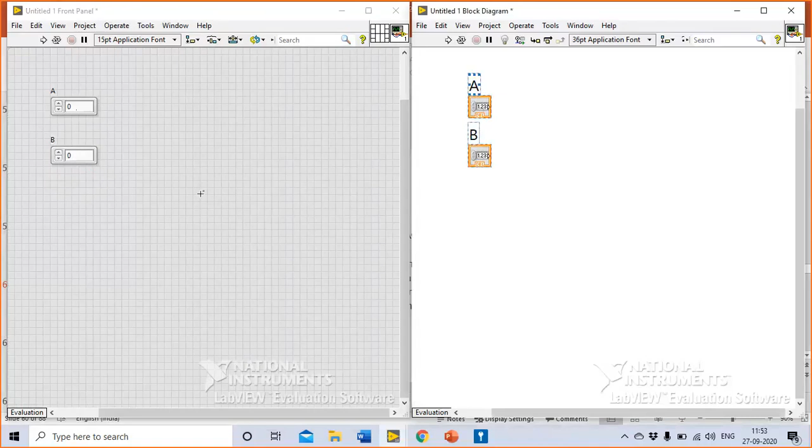I again go to numeric, create another number, call it B. Now what representation are both of them in right now? Floating point - they are both floating point double precision numbers. So I can enter decimal values here as well, because it's a floating point number. Now I will add one indicator to indicate the result.

And we need to add a control to provide the operation, like what operation the user wants to perform on these 2 numbers. Now, how many of you understand the term called enumerations? Parikshit sir had covered this on the first day. How many of you understand enum? Okay.

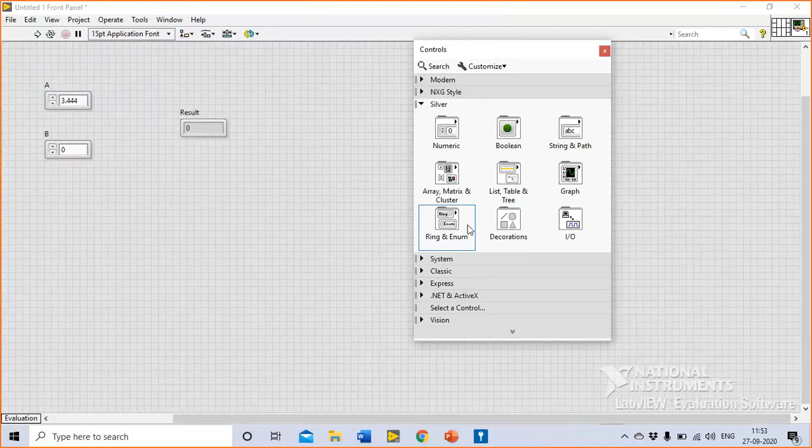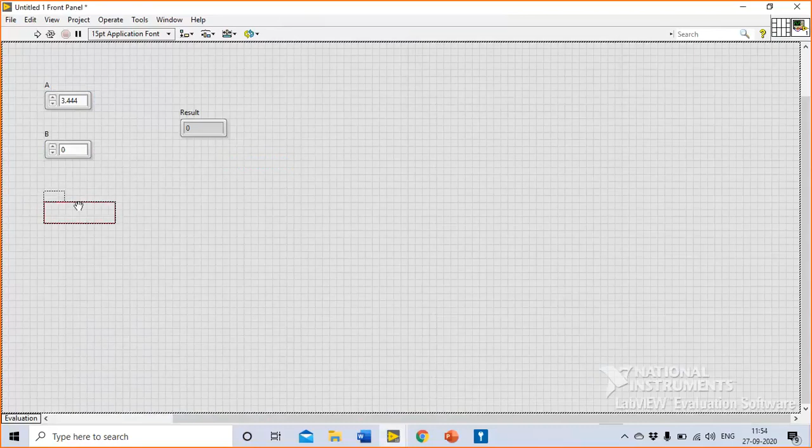Basically, what enumeration does is, so where to find enumeration, first of all, I'll do that again for you. Right click on the front panel, you go to controls palette. Under controls palette, go to silver. Under silver, go to ring and enum and choose enumeration. Okay. Now, what enumeration does is basically it links various strings to a particular decimal number.

So let's say it will map add to 0, subtract to 1, multiplication to 2, division to, let's say, 3. That means if I add a string here, add, and a user chooses that, it will go as 0 to my block diagram. I can handle it as a number instead of a string, right?

So let's try that. I go here and click on edit items. Okay. And I insert my first value, which is, let's say, add. I insert the second value, which is subtract. I insert another value, which is multiplication. And I insert another value, which is division. Is everyone with me till this point?

Sure, I'll do that. So let me do that again for you. I'll remove this. We will go to silver, and we'll go to ring and enum, and place an enum. Vinit: Yes, sir, we have to enter in the reverse manner, na? Because it goes one down. Yeah, I will do that, sir. I'll help them change that. But first of all, let's enter the values. Okay, everyone done till this point where you have been able to place an enumeration on the front panel? Okay, I assume that as yes.

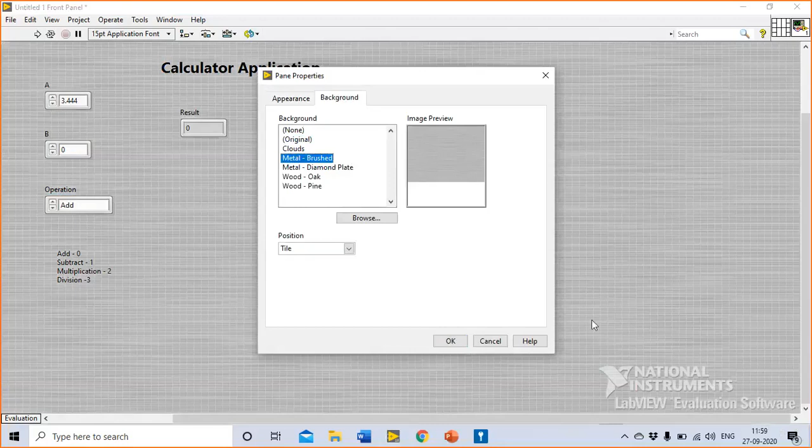I can add certain text here. How do I add a text here? I can simply double click on my screen and start typing here. I can of course change the size and text of this, and I can make it bold by pressing Ctrl+B. I can also change the background of the screen. Go to the bottom corner where two scroll bars meet. At this point, right click and say properties, go to background and make it metal brushed. Okay, my front panel is done now.

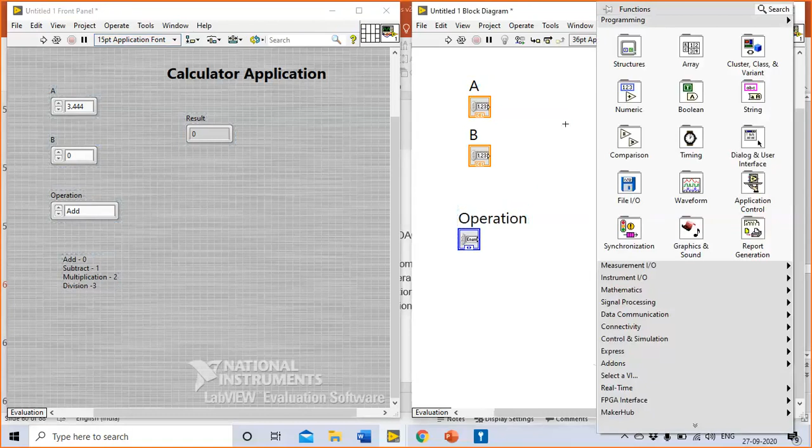I will move back to my block diagram. As you can see, while I placed certain controls on the front panel, I have their terminals on the block diagram. Now I will place a case structure to handle the various cases of add, subtract, multiply, divide. So I go to the block diagram, right click and go to functions palette. Under functions palette, go to programming. Under programming, go to structures. Under structures, go to case structure. Okay, my case selector terminal would be this enum.

As soon as I connect it, though it is an integer, blue numbers are represented by integers. Though it is an integer, on the case structure you can see them as strings. Why? Because the enumeration has already mapped these strings to decimal numbers, right?

Now I only have two cases here, add and subtract. I want to add two more cases. So I can right click the case structure and say add case for every value. As soon as I do that, I will have 4 cases, one each for add, subtract, multiply, divide.

I will wire my A terminal, or the terminal of my A control, to the boundary of the case structure to create an input tunnel. In a similar way, I will wire the terminal of B to the boundary of my case structure to make an input terminal B, right?

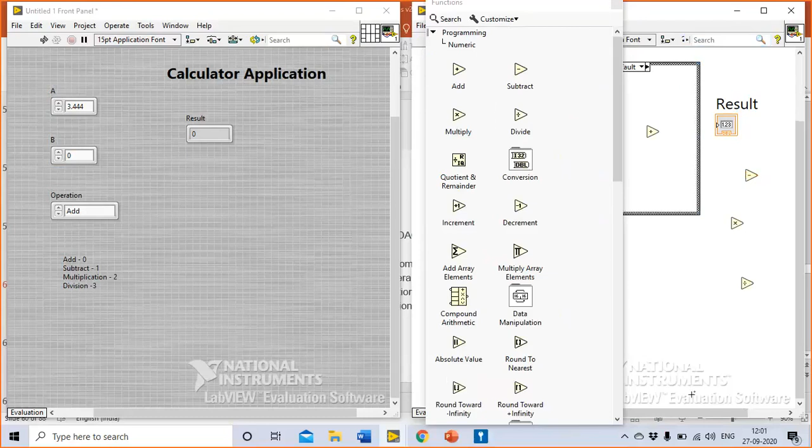I'll go to the add case. I will simply right click, go to the functions palette. In the functions palette, under the programming tab, I'll go to numeric. Under numeric, I have add operation, subtract operation, multiply operation, and divide operation. I will close this here.

I've placed the add operation inside the add case, and I am just wiring the numbers. The output has been wired from the add operator to the result. While I was wiring, it automatically created an output tunnel. Right now it is blank, there's a small white patch inside this tunnel. Can anybody answer as to why?

Because all cases are not defined right now. Yes, all cases are not yet defined. That's a very right answer. So let's define it for the other cases. I'll go to subtract, and you can see nothing is going here. So if this program runs, LabVIEW would not know what to show in the result, and hence it gives us an error that you have not wired the tunnel.

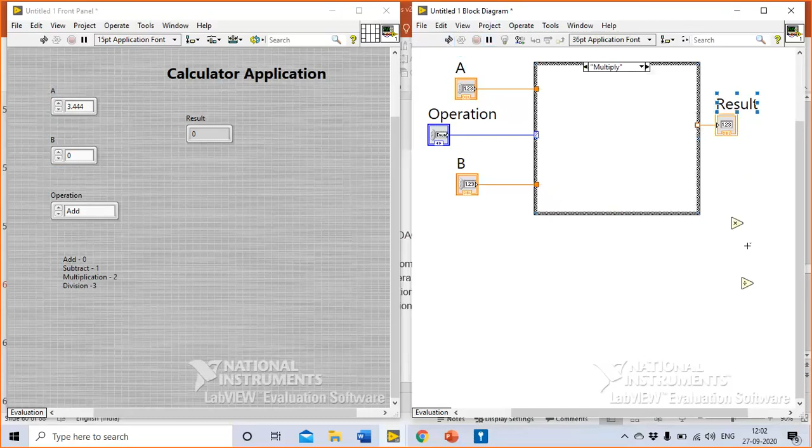So I will place subtract inside the subtract case, connect it, and connect the result. I will again go to multiply. In multiply, again I will move my multiply operator inside, wire these, and connect it to result.

In the divide operation, this is the critical piece. If I simply wire this, and if this is 0, it will pass on a NaN result, not a number. So what we can do is create another case structure inside this, around this portion of my code. The selector terminal of this case would be connected to a logic.

I want to create some space here because I'm left with little space. So I press Control on my keyboard, left click here, and drag my mouse. So I'm able to create some space to add some logic here.

Now the logic I want to add is whether it is equal to 0. If B is equal to 0, then the division should not happen, right? So rather I should say B is not equal to 0. If B is not equal to 0 and that statement is true, then division will happen. If B is equal to 0, then this will go to the false case, and we can add our logic here.

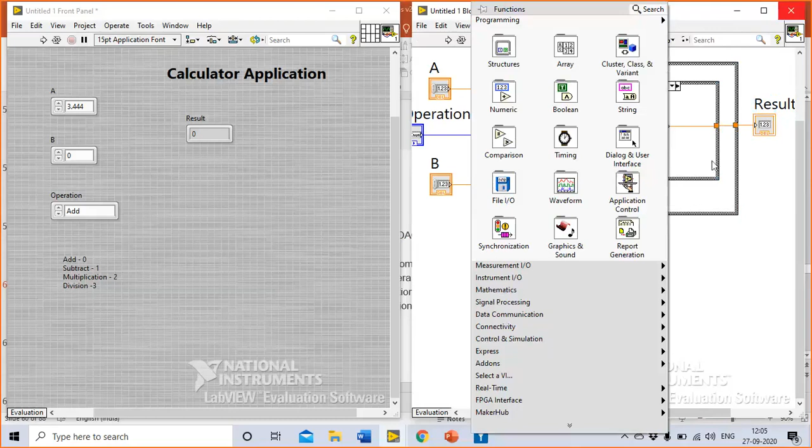So we can simply let it divide and show infinity in the results, but we will pass on a message to the user here, right? How do we pass a message to the user? We can create a string indicator. How do we do that? We come to the front panel, right click, go to silver, string, and create a string indicator. Okay, now we have an error here.

Okay, we have an error. Hello, sir. Yes, ma'am. Can you repeat the division section again? Sure, absolutely, ma'am. Do you want me to repeat the inside case structure as well, ma'am? Yes, sir. Okay, no problem.

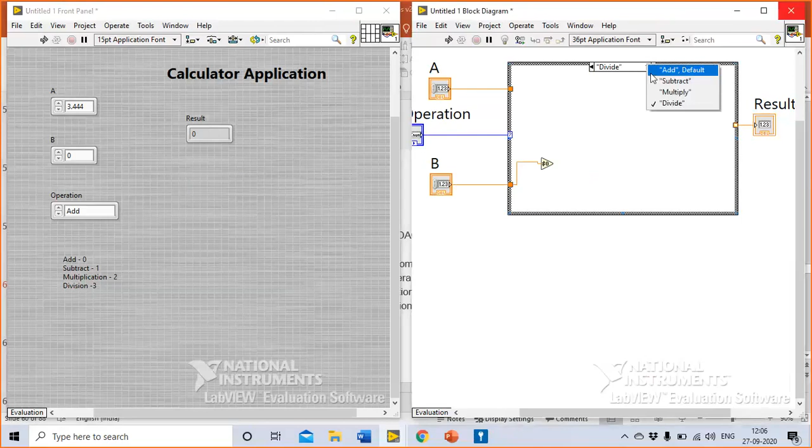I will delete this. We've just finished add, subtract, multiply, and we are doing the programming again for the divide portion. First of all, we need to check whether this number is equal to 0 or not. To find that, I can simply use a comparison operator. How do I find it? I right click on the block diagram, go under the programming tab, go to comparison, and say not equal to 0.

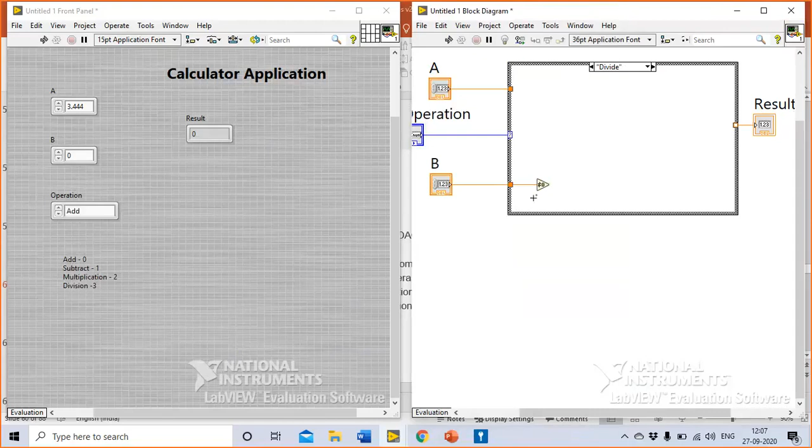Okay. Now, if I'm using a not equal to 0 operator, that means if a number is equal to 0, it will give me false. If a number is not equal to 0, it will give me true. So if it is not equal to 0, then I will get true. If it is equal to 0, then I get false. I've just added this as a comment for you to remember this.

How to add a comment? You can simply double click and start writing. Is this clear till this point? Should we move ahead?

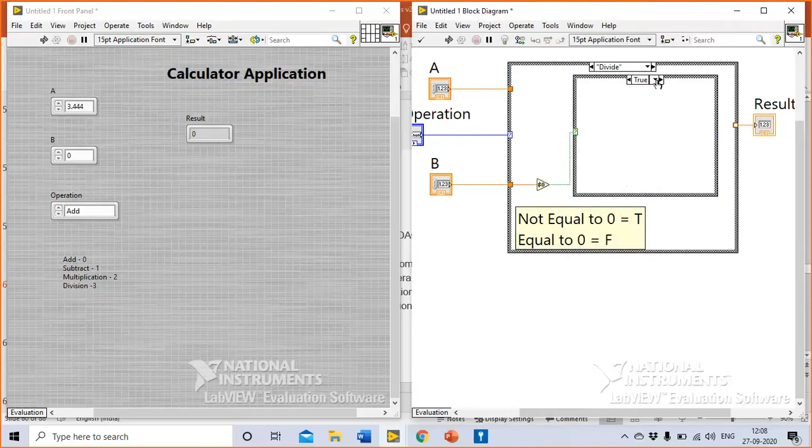I cannot hear anyone. I'll place another case structure inside this case where I will wire this comparison terminal to the case structure. So if it is not equal to 0, I will get true. That means it will get into the true case. So what should I do if the number is not equal to 0?

I can simply divide, because if the denominator is not equal to 0, I can go ahead and divide. Now, how do I place a divide operator? Simply right click, go to numeric, and place a divide operator.

Okay. While we did this, we saw that there is a tunnel which has not got all its values. Why? Because there is nothing in the false case. So we should give something in the false case. There are a couple of approaches which we will discuss. The first thing we can try is simply let it divide, but notify the user that there seems to be some problem with your denominator. So I will simply let it wire.

Is it done till this point, ma'am? Yes, sir. Okay, great. Now we have to indicate to the user that there is something wrong with the operator. So how do we do that? We come to the front panel, right click, go to silver, string, and string indicator. I place this on the screen, name it error.

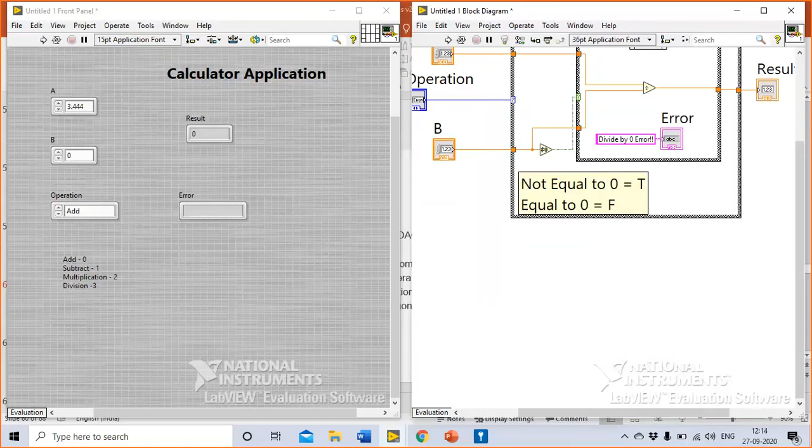Did anybody unmute? Anybody has a question? Okay. Shweta ma'am, is it this portion of the code or the complete internal case again? Okay, only this portion of the code. Yeah, I can do that again for you.

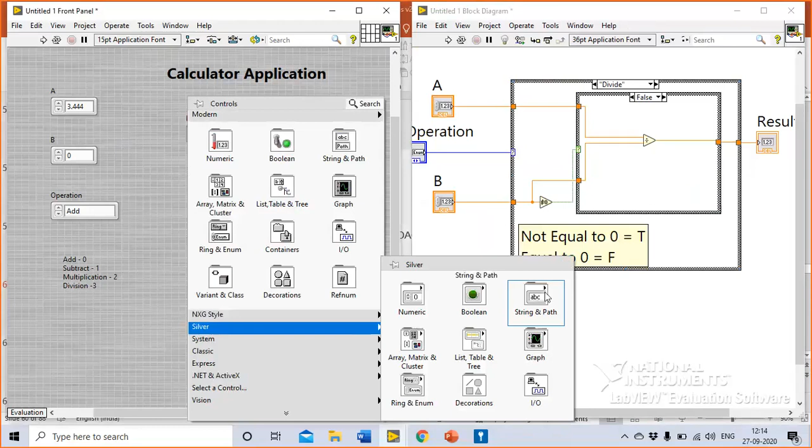I'm deleting it. Okay. Now I want to indicate the error to the user. I go to the front panel, right click on the front panel, go to Silver, go to String and choose String Indicator. Please remember to do this on the front panel. All controls and indicators are created on the front panel. So I will name it as error.

Now bring this error inside this internal false case. Once it is done, you can simply right click this terminal and create a constant. In the constant, you can mention divide by 0 or divide by 0 error. Simply just write that. So this indicator will display whatever you mention in this constant. Great. Any questions, anyone? Please ask now. Otherwise, I'll move to the next step.

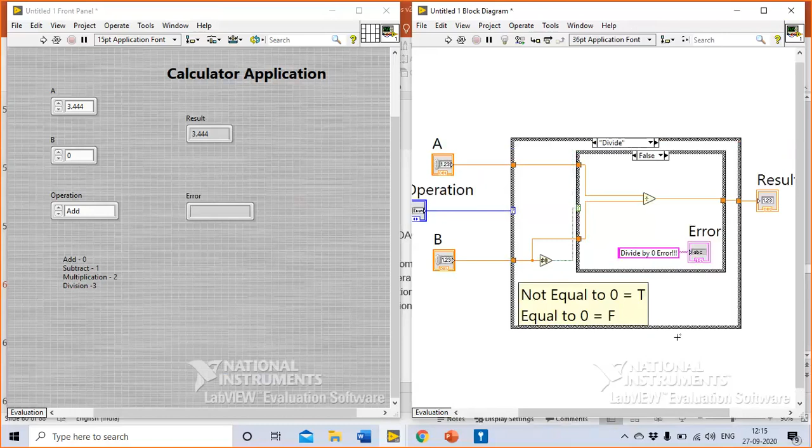Okay, we need to do one more thing here. If I run this, it will run only once. I want to make it run continuously, so I have to put this inside a loop. So I will go to Programming, Structures, While Loop, and place a large while loop around this. And in the stop terminal, I will create a control for the user to stop the program. And I will bring this stop to the bottom for the user to stop this. Is that okay, everyone?

I will run this program. We can see it is running. Let's change the operator. Let's say I do subtraction. It gives me -2.556. And let's say I multiply, it gives me 20.664. If I divide, I get 0.574. Let's test out our divide by 0 condition. Let me take it down till 0. Okay, so it shows infinity at the result and shows that there's an error of divide by 0. If everyone is done till this point, then I'm going to add a few more things here.

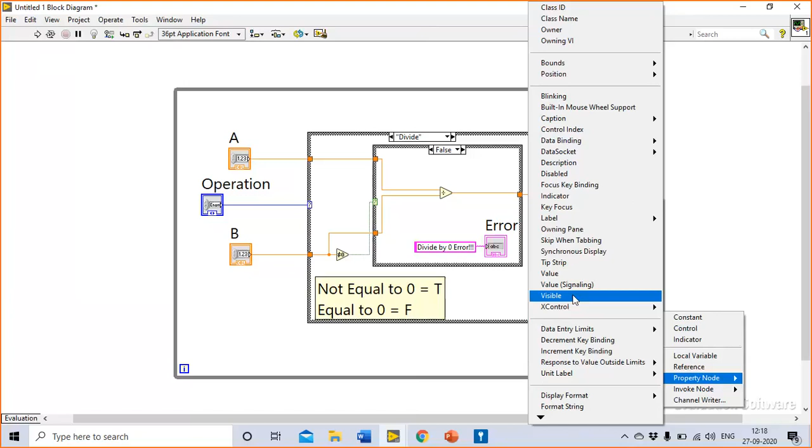Can we make the program in a way that if we find this divide by 0 error, this result is not shown to the users? We can just hide this indicator itself. Now, the way we hide indicators in LabVIEW is through the properties of these indicators. So I have this result indicator on the block diagram. I will right click this and create a property node. Right click, create property, and there is a Visible property for this indicator. I will place the Visible property.

Before that, there is another issue with the program right now. The issue is I have placed divide by 0 error in this error terminal. Even if I correct that error, it will continue to display this on the screen. So for a moment, I'm putting this visible part on hold because I uncovered another issue with the program. So let us see that. You can still see my value is 234, but it still shows divide by 0 here. Can anybody tell me why?

Actually, once the false case is run, it's not getting updated after that. Yes, the string indicator is not getting updated once it has entered the value, right? So how do we change that? We will bring the error indicator outside our loop, so that for every case, for every operator, there is some value going to this error. So when there is an actual error, which is this case, a divide by 0 error should go. In all other cases, an empty string should go to the error.

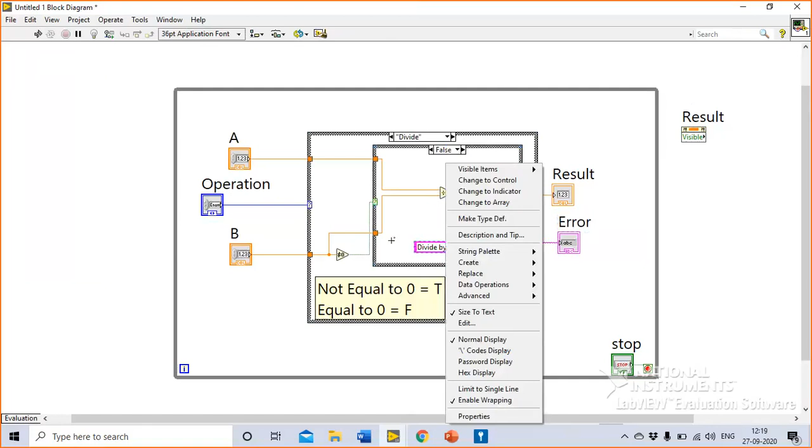How do we create an empty string? Just select this, press Ctrl C on your keyboard and press Ctrl V. You will get this string. Bring it outside the loop. Highlight the text and press backspace, so you get an empty string constant. Place it in all other cases. The string should be given to all other cases. I will again Ctrl C, Ctrl V, get another copy of it, and place it in all my cases. Everyone with me till this point?

Everyone with me, or is anyone facing trouble? Now if we test it out. Sir? Yes. Sir, if we do a use default if unwired, then won't it give a blank string or any other? It will. It will.

So let's say what Raghav is asking right now is, let's say I delete this statement here. Okay, I have deleted this. Now this tunnel says that nothing is wired to me in this case, so it is giving an error. So I can right click this and say use default if unwired. Yeah, what is the default for string? It should be an empty string. Let's try that out. Okay, so we'll remain in divide case, make it 0, and go back.

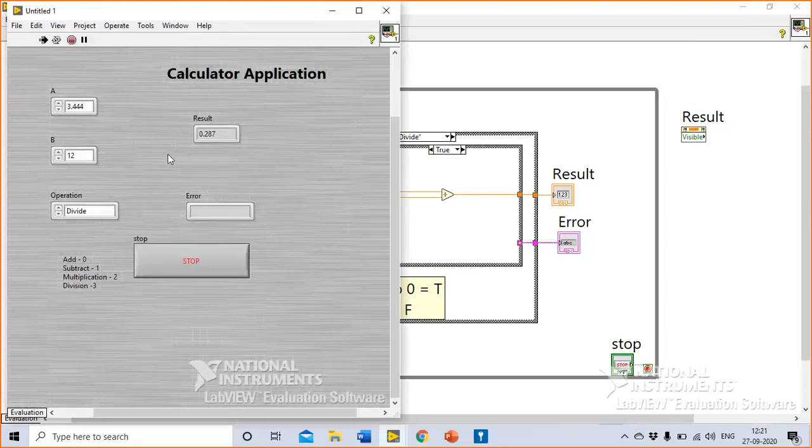Yeah, so a shortcut which Raghav just pointed out was, I don't want to place these strings in each of my cases. I simply want to let it use a default value. So I can right click this tunnel and say use default if unwired. Now, what is a default value for a numeric indicator or a control? It's 0. Yes, the default value is 0 for floating point, integers, unsigned numbers. For strings, the default value is empty string. Yeah, both the options are perfectly fine.

Okay, I hope all of you are with me till this point. Please confirm on the chat window. Then I'll move to the next step. We have to quickly get to a Talking Tom application also. So please confirm on the chat window whether you've reached till this point or not. Great. Couple of people responded, so I hope all of you are with us.

Now, the next step is, as soon as we find a divide by 0 error, we will hide this indicator. How do we do that? Come to this result on your block diagram, right click this and say create property node and visible. Now, what is a property node? A property node is a programmatic way of accessing properties of your front panel and block diagram items. Programmatically I can access their properties and change them, right?

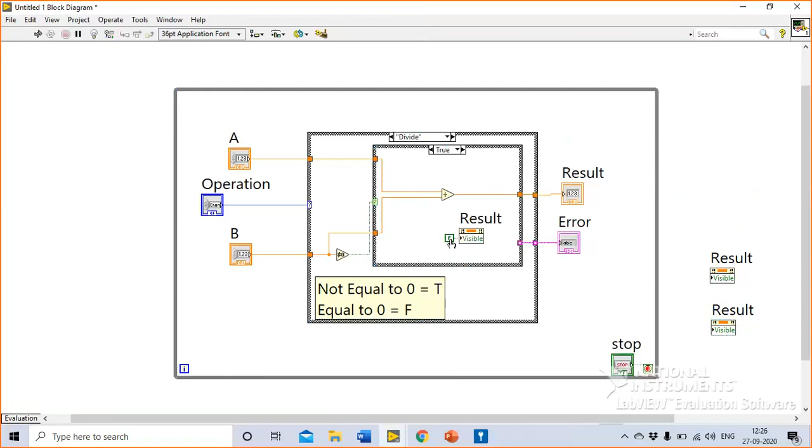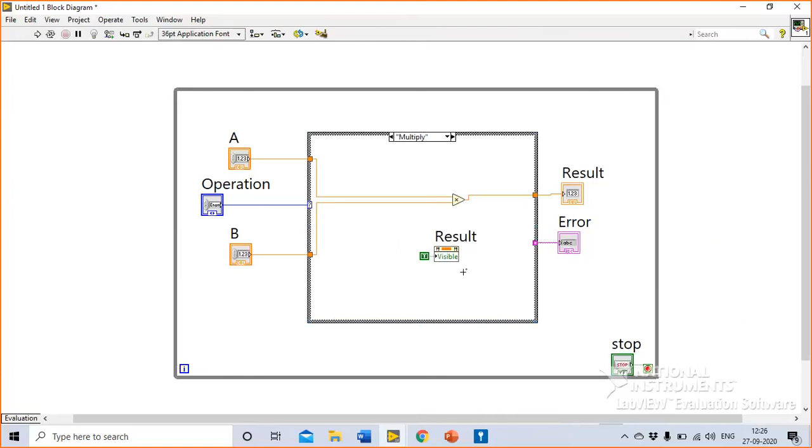I've pressed Control and dragged. True. Multiply. I'll place this and make it true. Let's test this out. Okay, I will run it. I will keep changing this number, bring it down.

Am I audible? Yes, sir. Okay, my electricity had just gone, so I was just checking if you can still hear me. Okay.

Okay, now I will bring it down to 0. You can see as soon as I make it 0, this result vanishes and gives me an error, divide by 0. I will increase this. I get back my result and the error also vanishes.

I'll just be back in 10 seconds. Just give me 10 seconds.

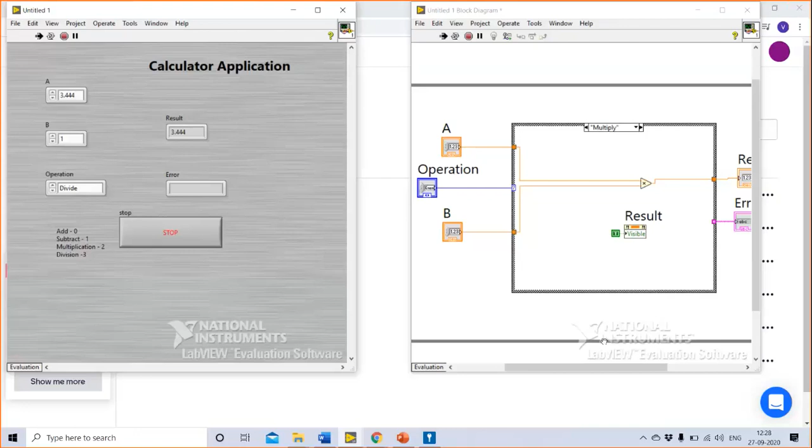I am back. So is everyone with me till this point? You've been able to make this? Sir, I'm not able to drag the property node. This one, the property node, right? Yes, sir. Okay, so do it with me. Let's say you have one property node. First of all select this. Okay, done. Then press Control on your keyboard. Click this and then drag your mouse while clicking.

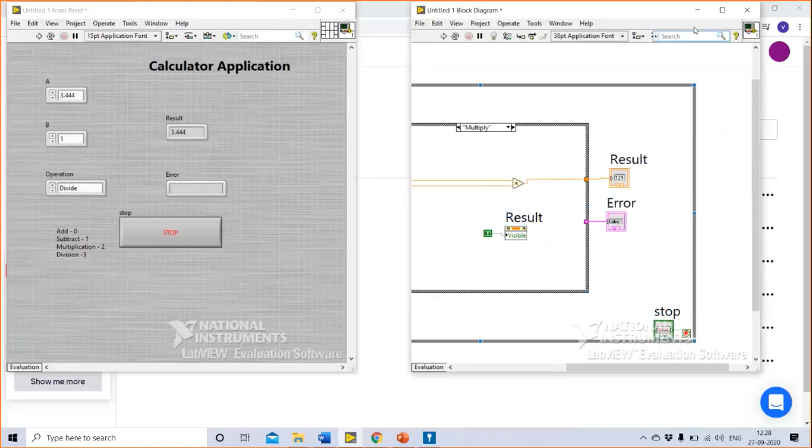Were you able to do it? Done, sir. Now in all other cases we have to make it true except for the divide by 0 case. Only in the divide by 0 error condition we have to make it false. In all other cases we will make it true.

Isn't it interesting? The way you can simply control the GUI of your software, you can add logic to your program. So please tell, how do we get that visibility node?

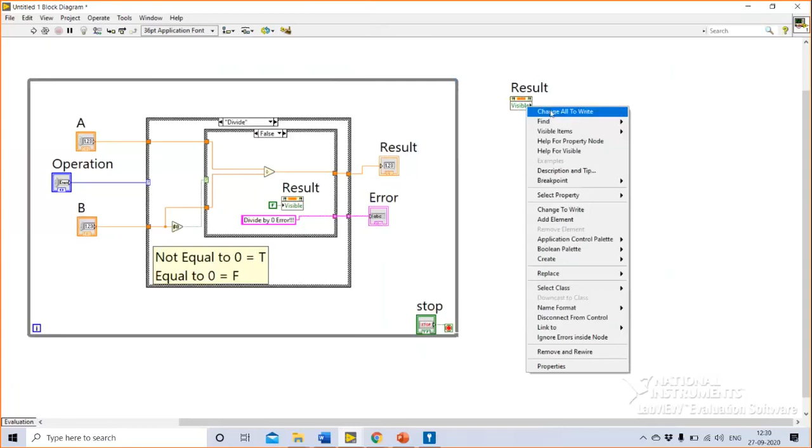Right click the result. This is my result, right? Right click this, create property node and go to visible. As soon as you do that you will be able to create a property. Now right now this property is in the form where I can read from it, but I want to write to it. I can right click this and say change all to write.

There was someone else who had a question. Sir, why is it that if we are giving a visible property, we have to define it for everyone? For the false case of divide, I defined a visible property, and in the other cases I didn't define it, so it's not getting updated there. I even tried to take it out of the case structure for the result and the error. But still the same thing was happening: once the result disappears, it's not reappearing unless I give it separately for each and every case. Why is that happening?

Okay, let's understand that, Raghav. Let's say what you're saying is I have made the visibility false here, and I don't define it anywhere else. Is that your question? Let's say I make this false and I remove the true in all other cases. Now, why do I not get it visible again? Is that the question?

So now, Raghav, once in the divide by zero case we have written false to this, that means I have changed the property of this indicator. I've changed the visible property of this indicator, made it invisible in one of the cases. Until I make it visible again, until I change the property of this indicator again to make it visible, I will not see it on the screen. Do you agree with that statement? Agree, sir.

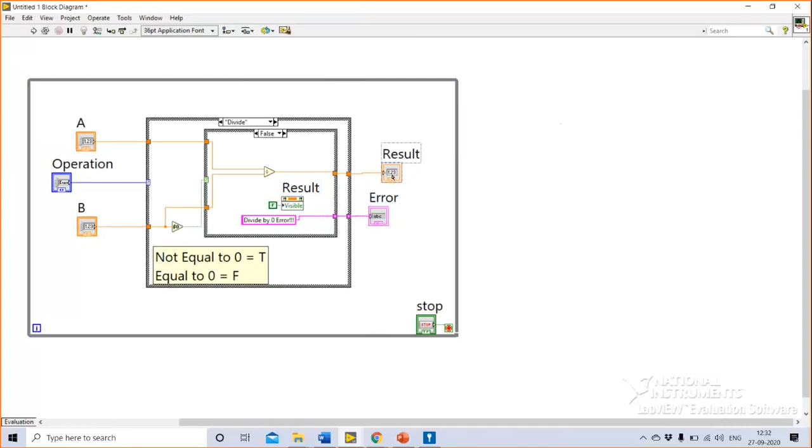Now, it's a property, a characteristic. Once it's changed, it has to be changed again, reverted back for you to bring it to the original condition. Once a property is written, it is written. So if I've written false to it, it will remain false until you make it true again. Agreed? Now there is another scenario.

Let's say I make a copy of this. Come into the true case and just make it visible here. So what I'm saying is, if I have a divide by zero error, I will make it false and it will disappear. And if I don't have a divide by zero case, it will make it visible again. So what will happen now? What can be a condition in which I will not see the result even if there is no error?

Multiply, subtract, add. So what can happen is, let's say I'm running the program. I don't have an error right now, then I have an error now. This has vanished. And if I move to a different case now, I will not see the result because the property has not been written again, the property to make it visible has not been written again. When will it be written? When I go to divide and make it non-zero, only then the property will be written, which is not the right way of programming.

What we wanted is, if there is any case where there is no error, then the result should appear. So the best way to do that is to add this property node to all the cases and make it true in all the cases. I think I've missed that, yeah, great.

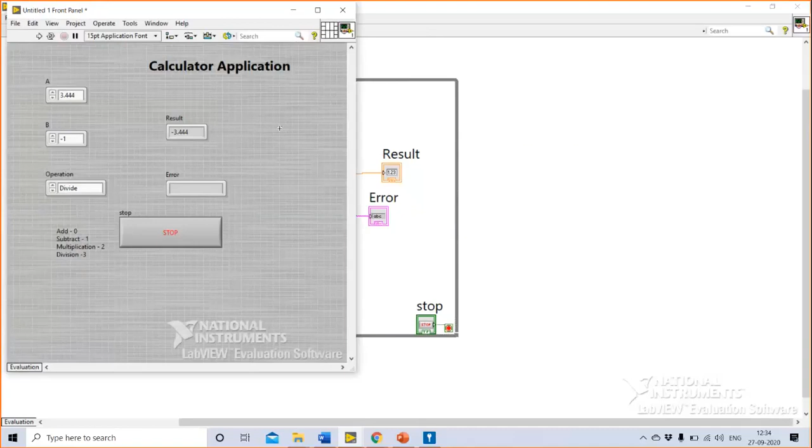So I hope everyone is with me. Can we move to the next section of DAQ and the audio analysis application which we have been talking about since yesterday? Yes, sir. Okay, great. Thank you for the confirmation. Let's move on.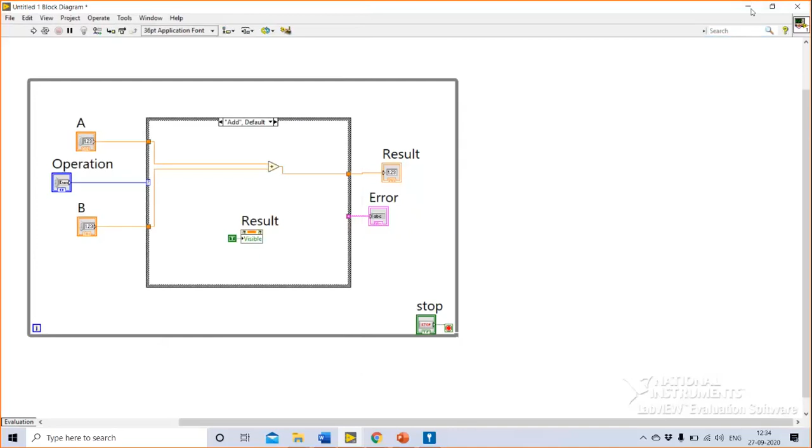Now what we will do is, we discussed about Arduino yesterday, right? We interfaced till this point. Now let's say, do you remember what was the ADC resolution of the Arduino? Does anybody remember?

Do you all remember there are 3 R's of data acquisition? What are the 3 R's of data acquisition? Resolution, rate, and range. Yes, resolution, rate, and range.

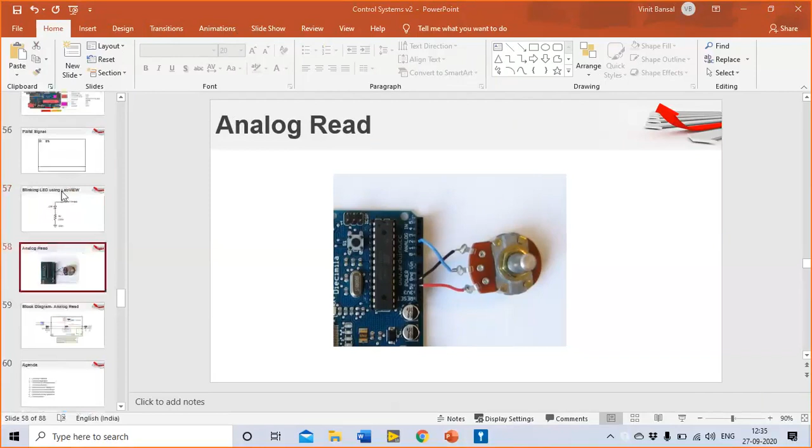So what was the resolution of Arduino's ADCs? 10 bits. What was the rate at which I can read from Arduino's ADCs? Around 9 to 10 kilohertz, kilo samples per second. And what's the range of Arduino's ADCs? 0 to 5 volts.

Now, in an industrial scenario, let's say we are working on a process plant, or testing our next satellite which will go in space, will our voltage levels ever be only 5 volts? Satellites work on 42 volt bus and 70 volt bus, right? So 5 volts is definitely not enough for them.

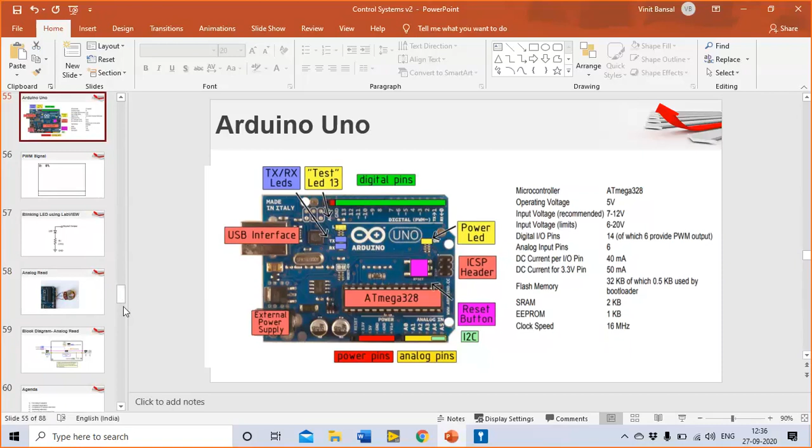Now, our signals which are there on satellite run in Gbps. The digital signals go in the Gbps rate. Their analog signals, their communication signals, go in gigahertz range. So would 10 kilosamples ever be enough for those applications? Not really. And the resolution also, a lot of cases we need to go as high as 24 to 28 bit resolution. So there are professional DAQ devices available in the market.

I'll show you a quick comparison between one of the Arduino devices and one of the early industrial DAQ devices from NI, which is like the first or second product cost-wise.

So the resolution of the ADC of the Arduino is usually 10-bit. Typically, NI would offer in its basic DAQ device somewhere between 12 to 24 bits of resolution. Cost would be, Arduino would be 1 to 2,000 rupees if you buy the Made in Italy version. If you buy the Made in India version, it is available for 200 to 300 rupees as well. Now, the NI DAQ devices typically would have a starting range of around 10 to 11,000 rupees.

There is usually no overvoltage protection in Arduino, whereas there is good overvoltage protection built into an industrial DAQ device. What do I mean by overvoltage protection? More voltage because of few fluctuations that might happen. Like in Arduino, the range is 0 to 5 volts. So due to fluctuations, sometimes it may happen that the input is more than 5 volts, which would damage my Arduino. But in NI's case, it won't, since it has a protective circuit over there.

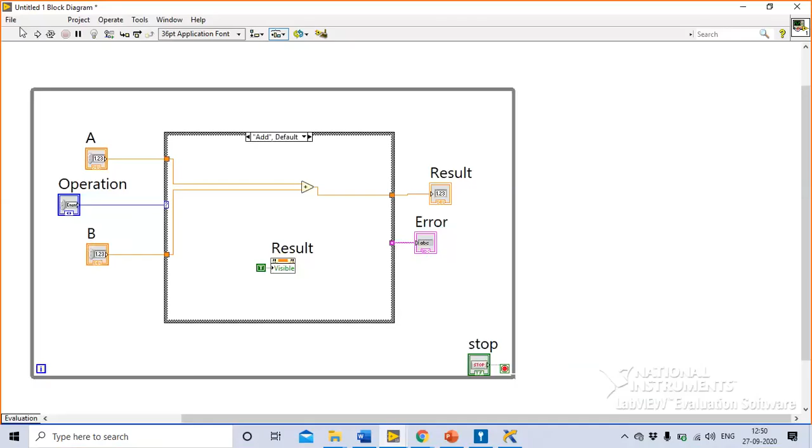So let us very quickly interface with this device in LabVIEW. What we will do is read a waveform from this device in LabVIEW and show it over the screen. I hope everyone is able to simulate the device. I will go to LabVIEW, create a new VI, and press Ctrl+T.

I'll go to the block diagram, right click, then go to Measurement I/O. All the NI devices, the drivers of all NI hardware devices, will show up under Measurement and I/O.

One of us had asked a question two days back, which I could not answer, about what's the difference between Simulink and LabVIEW — it seems to be very similar. Yeah, that was the question. I want to take an attempt at it to answer that. Now, Simulink is a very good tool for simulation — it is designed for simulation.

Whereas LabVIEW is not a simulation tool — LabVIEW is a test and measurement tool. When I say test and measurement tool, you can integrate quickly a lot of hardware with LabVIEW and build your test application. When I say a lot of hardware, NI makes more than 20,000 devices, ranging from data acquisition devices to oscilloscopes, signal generators, RF analyzers, RF generators, vector network analyzers, various devices, and FPGA-based devices as well.

So we have 20,000 NI instruments, and more than 30,000 non-NI instruments which work with LabVIEW. What LabVIEW allows you is to quickly interface and prototype your system or your test system very, very quickly, and help you deploy it into industrial conditions.

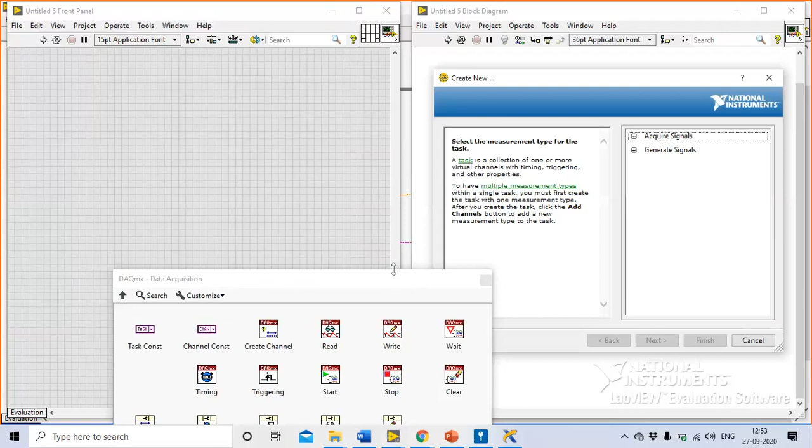Actually, the day before starting this course, I was going through that sample video, sir, as it is on the website. There they have used this DAQ Assistant, and they said go to video 2 for analyzing this data. But I just completed one video, sir. It was very interesting. I had just gathered the data according to that 5-minute video. Great, no problem. We'll analyze it today as well. We'll analyze the signal today.

So what we will do is I'll show you once again, for people who might not have followed, how I brought this DAQ Assistant. My DAQ Assistant is open right now; I will just delete it and show it again. You right click on the block diagram, go to Measurement I/O and choose NI-DAQmx, DAQ Assistant. All of you with me?

Yes, sir. Okay. Now, you might get a window here for licensing information. If it asks you for a license, you can say, yes, I understand. Did anyone get a licensing window, a window to approve licensing? Yes, sir. What options does it give you? Only one, license manager and I understand. Yes, click on I understand and move forward.

And you will get this window, whether to acquire signal or generate signal. I want to acquire signal, so I'll click on acquire signal. Then it gives me an option whether I want analog input, counter input, digital input, or TEDS input. What is TEDS input? Anybody want to take a guess?

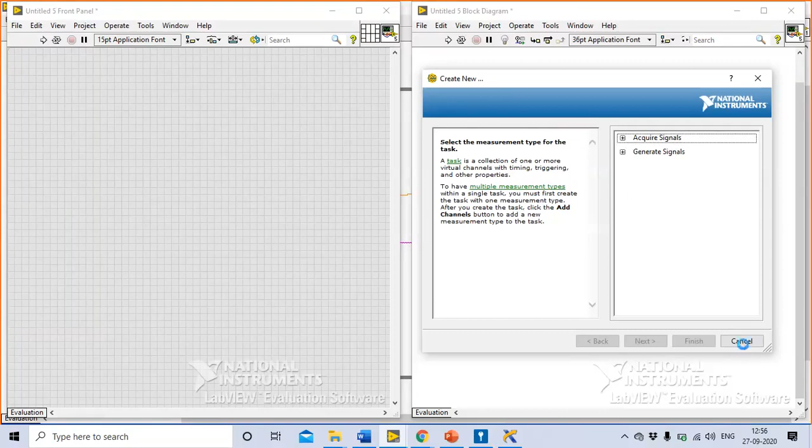There's a question on the chat window: can you show how you got the create new option after Measurement I/O? I'm sorry, ma'am, I didn't really understand the question, but I will repeat this process for you. I will delete this. Right click, go to Measurement I/O, DAQ Assistant. I place it on the screen. You may get a licensing window here. Click I understand and then choose acquire signals. Under acquire, you will find these options. I was explaining TEDS under this. Ma'am, are you with me? Whoever posted that question.

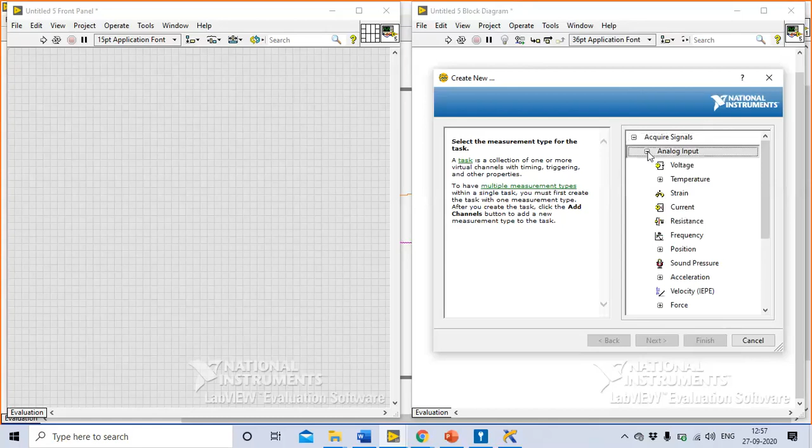Now, we'll choose analog input. I explained the TEDS piece. Somebody asked, is it automatic? Yes, it will automatically pick up the data sheet from the sensor if you use the TEDS option. But right now we don't have an actual device here, so we will simply go to voltage and choose voltage. It had 2 channels of analog input, so I'll choose one channel, AI0, and I will finish.

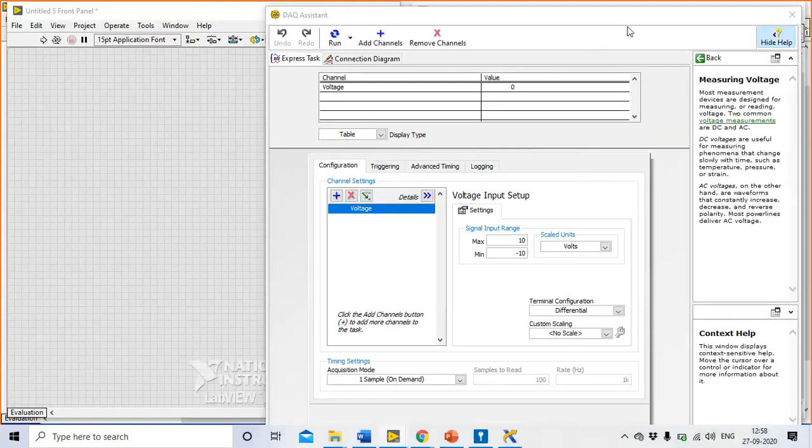Now this is a window where you can check all the settings of the DAQ device. First, you can check the connection diagram. It will automatically show you where to connect what. The connection diagram was available in this tab. Come back to the express task. I can set the voltage range. Remember, plus minus 2 volts and plus minus 10 volts of the myDAQ. Let's say I'm using plus minus 10 volts.

Now the measurement can be differential. In certain DAQ cards, it can be referenced single-ended and non-referenced single-ended. If your sensor has 2 wires, positive and negative, then you use it in differential mode. But if it only has one analog output and the other is ground, you typically use referenced single-ended mode. For now, choose differential.

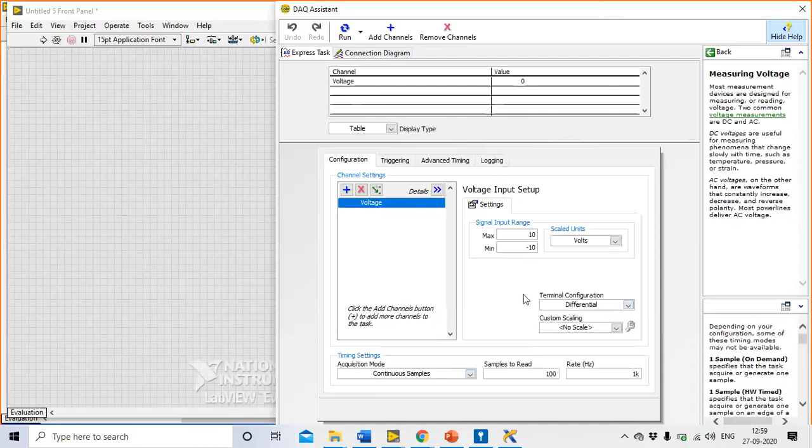In the acquisition mode, you can choose continuous samples. I want to read it continuously. Here you can define the sampling rate of the DAQ device. Let's say I want 20,000 samples per second, so I'll write 20,000 here. That means every second it will acquire 20,000 samples. Now what is samples to read? Any guesses?

Any guesses? Total number of samples. So, continuous samples. So it will keep acquiring till the time the user stops it. So what is the samples to read? Basically, let's say I'm reading at 20,000 samples per second. Okay. In LabVIEW, what if I start plotting 20,000 samples in one go?

What will happen is you will find that the LabVIEW screen is hung for 1 second and after 1 second it shows data. Again, it is hung for 1 second, and then after 1 second, once it has acquired 20,000 samples, it shows up on the screen. Again, it will get hanged for 1 second and then show 20,000 samples on the screen. We don't want that. We want the user to have a good experience. We should continuously keep seeing data.

So though we are acquiring at 20,000 samples per second, we will keep plotting, let's say, 2,000 samples in one go. That means every 100 milliseconds, 2,000 samples will be brought to LabVIEW and will be shown on the screen. So that way your screen will continuously update, and you will not see a problem of hanging on the LabVIEW screen. Okay? So what this essentially says is, whenever the DAQ device has 2,000 samples available, please bring it to the LabVIEW screen and display it. Okay.

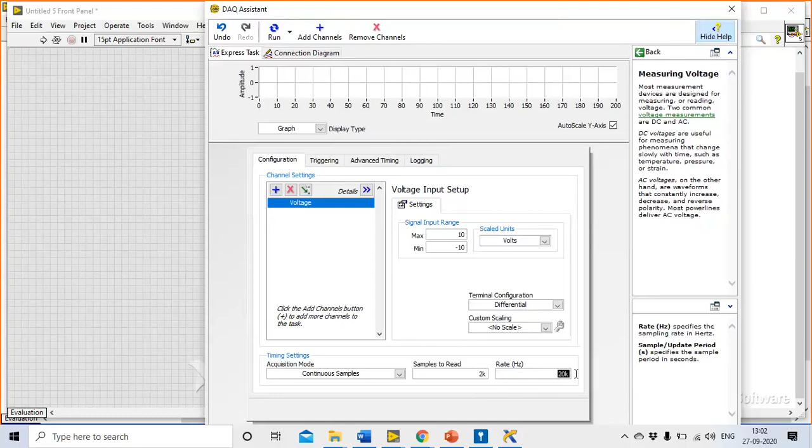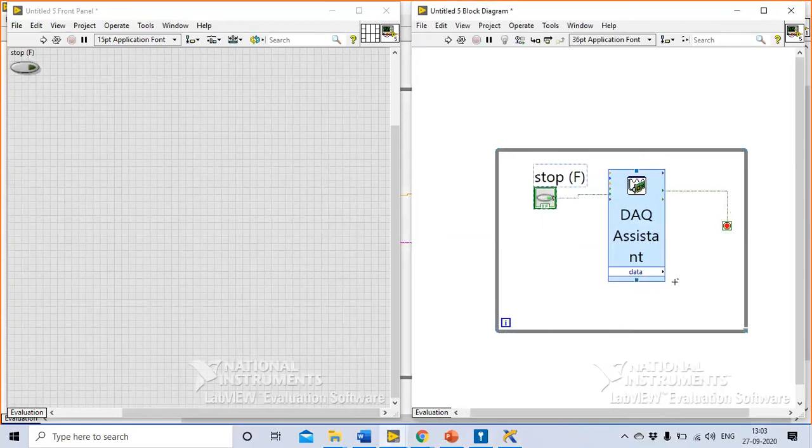I will press OK now, and I will go ahead and program this. Now it is asking me, you have put the task into the continuous acquisition mode, but I don't see any while loop. Should I place a while loop because you're acquiring continuously? I would say yes. So it automatically creates a while loop. Okay. Now we're getting data on this terminal. Okay. So we want to present it on the screen.

So what I'll do is I'll go to the front panel, right click, go to Silver, choose a waveform chart. Please remember, use only waveform chart, not waveform graph. In a couple of seconds, I will explain the difference. Sir, I have a question. You said for Windows, silver control is more preferable, right, sir? What if we use from the modern controls, sir? Absolutely no problem, sir. The looks of a silver control are better. So the experience of the user will be better with silver controls. The modern controls are a slightly older generation of controls. So I can use it from there as well.

Let's say I want to use the waveform chart from Modern. This is a modern waveform chart, and I'll show you how the silver one looks. Okay, so they're actually a contrast, sir. The name is modern, but the graphics are of old age. Yeah. Reason being, the earliest ones were classic, sir. Then modern came, and then silver came. And we have also started launching next generation, so we have NXG ones as well. But for this course, I would recommend you use the silver ones, which look the best. Yeah, it looks best, sir. Okay, sir. It was just a doubt.

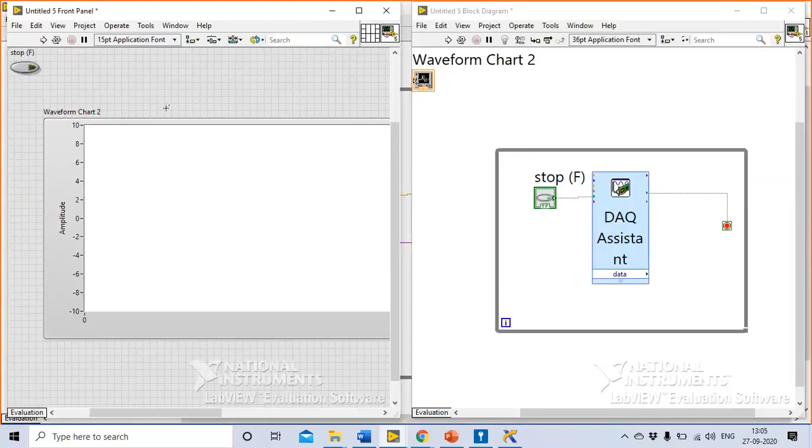Okay. No problem, sir. So you have placed a waveform chart. Is everyone able to place a waveform chart on the screen? Just a minute, sir. I will repeat that for you. So come to the front panel, right click, go to Silver, Graph, Waveform Chart. Waveform chart silver, first one, right, sir? Yes, first one, sir. Placed it, sir. Placed it, bring it to the block diagram, look at it on the block diagram and connect it with this data terminal. Okay, sir.

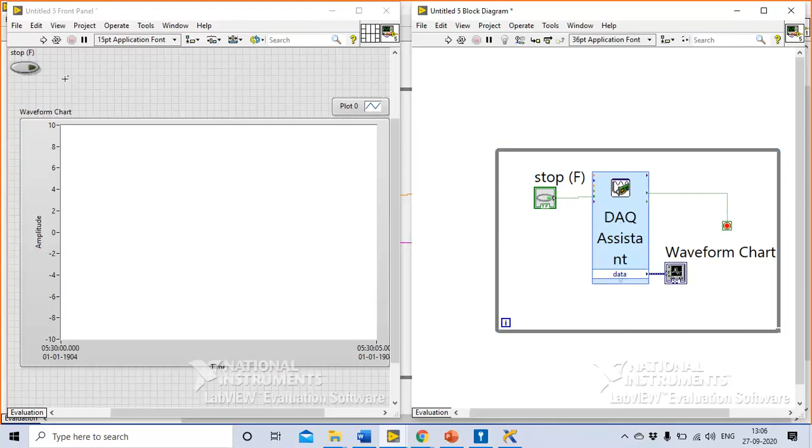Okay, now let me run this program. We will see a simulated waveform. So a simulated waveform on a DAQ device is typically a sine wave with a noise signal. Okay, there will be a sine wave plus there will be some noise overriding that sine wave. So I'll run it. You can see a sine wave with some noise riding on top of the sine wave. Yeah.

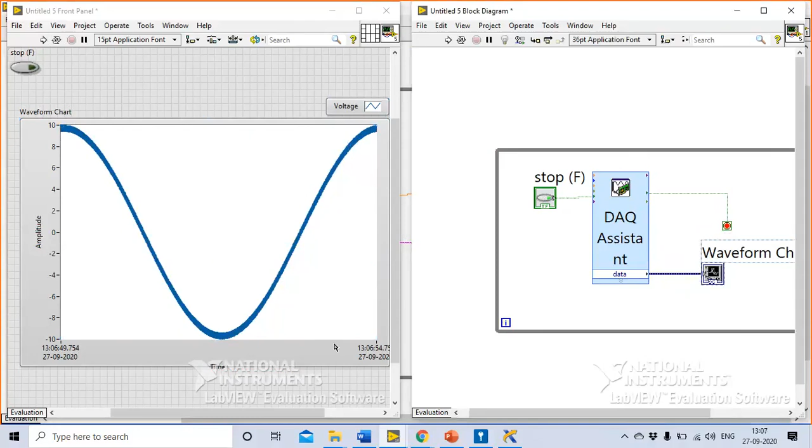Great, great. Now, we have this waveform chart. What we will do next is we will filter this noise out. How do we filter this noise out? Sir, are we getting the noise? Means, can you hear the sound? No. When I say noise, I forgot your name. Naveen sir, what I meant is you can see this thick band of waveform, right? The waveform is not thin, it's a thick band of waveform. So right now we're just acquiring signal. So the signal has an onboard electrical noise.

Okay, do one thing. Right click this indicator, which is this graph. Go to visible items and say graph palette. Okay, please everyone do that with me. As soon as you click on graph palette, you get a graph palette here, which basically has a zoom option. So we'll zoom this waveform and see whether there's an actual noise or not.

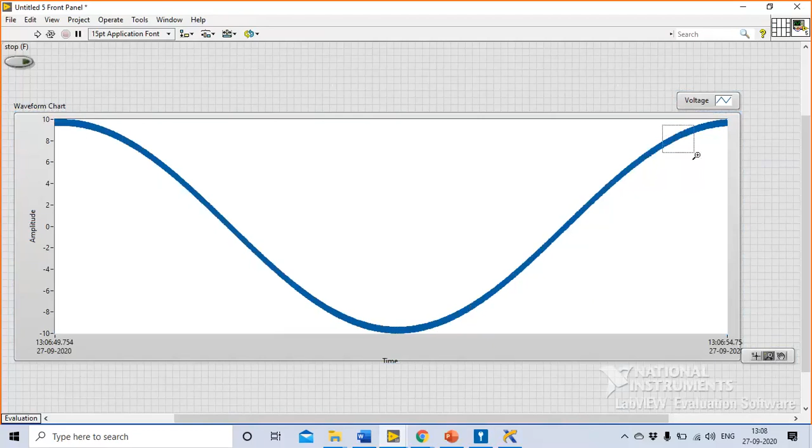Once this graph palette is visible, click on the zoom icon and let's say choose the first zoom option, and we will zoom on a selected area of our waveform, let's say this portion. Can you see this noise? Oh, now I can say it's a noise, sir. Yes, sir. It's a noisy signal, right?

Yes, sir. So we will click on zoom again, and there's an option to look at the full view of the signal. So I'll click on the full view, and this is the full view of the signal. Yeah, got it, sir. It's a noise, sir. Yes. Now we will go back to the block diagram and remove this noise. How do we remove this noise?

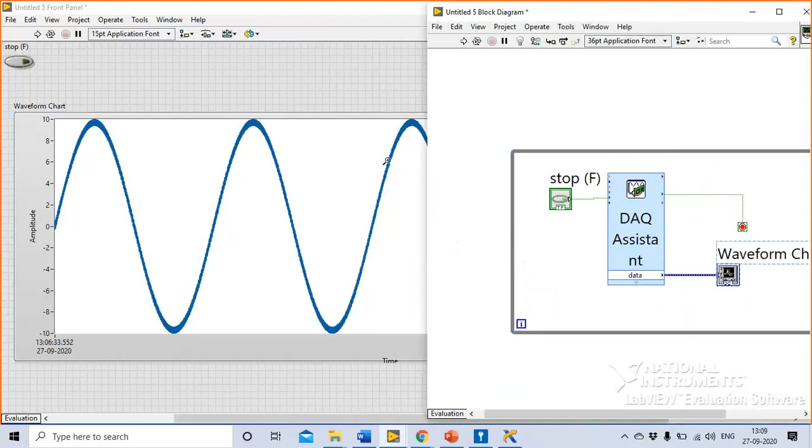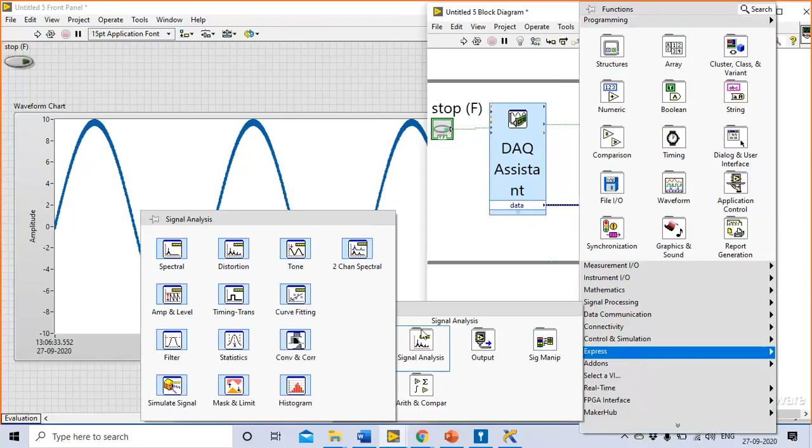I don't know, sir. We pass it through low pass filters, right? Sorry, somebody said something else? Sir, by filtering. By filtering, yeah. So we'll use a low pass filter. How do we use a filter? So we will right click on the block diagram and go to express. Sir, how did you do the full view? In the zoom option, there is an option to choose this one. You'll have to, of course, expand your graph or expand your chart to a good extent.

Now, I'll just do one more thing. I missed one point. I'll talk about the difference between the chart and the graph. So chart is something which is having the history as well. When I say history, this complete sine wave was not brought from the DAQ device in one go, right? A few samples came, we plotted those, then few samples came, we plotted those, right? What if we had used a graph?

Can we try that? So right click on the controls panel, go to silver, graph, and place waveform graph. Connect this waveform graph as well to this data. Okay, and I'll run it again. Can you see this graph only shows a piece of the data, whereas the chart is continuously updating and keeps the history as well.

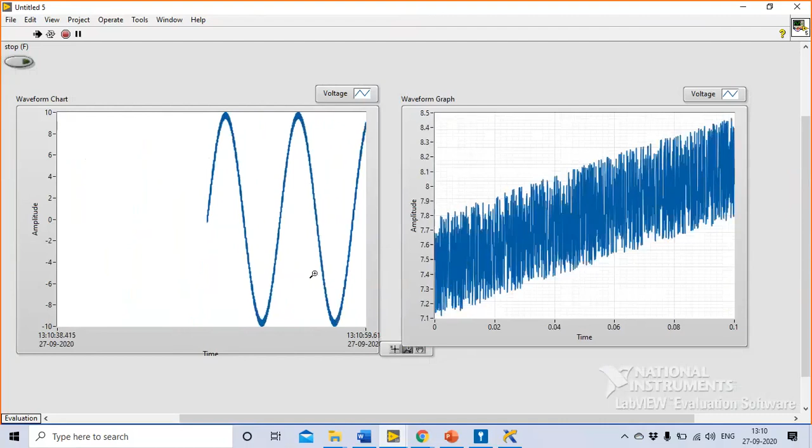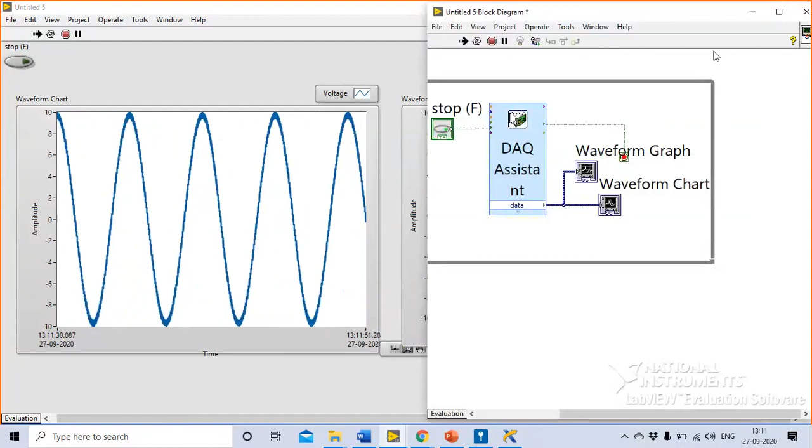To make it more clear for you, you can see the graph is showing you the instantaneous signal, whatever is being acquired from the DAQ, whereas chart shows you full history of the signal. Sir, please show the block diagram for 1 second. Yes, you can see the block diagram. Yes, sir. Thank you, sir. Okay, I hope you're able to connect it this way. Yes, I'm connecting it.

Is everyone clear with the difference in graph and chart? What's the prime difference between graph and chart? Oh, yes, sir. Graph shows the instantaneous signals, whatever is acquired from the DAQ, whereas chart also retains the history of the signal. Like whatever came in the previous iterations or 2 iterations back, that is also available on the chart window. Yeah. Sir, the graph is actually very fast, sir.

The graph seems to be very fast because it is only showing the instantaneous signal. So the x-axis is only for 100 milliseconds. We had chosen 2000 samples out of 20,000. So every 100 milliseconds, we had one set of data. So it is updating every 100 milliseconds. Whereas on the chart, also data is being written at 100 milliseconds, but the x-axis of the chart is actually more than 1 second, whereas it is only 100 milliseconds here on the graph. Okay, sir.

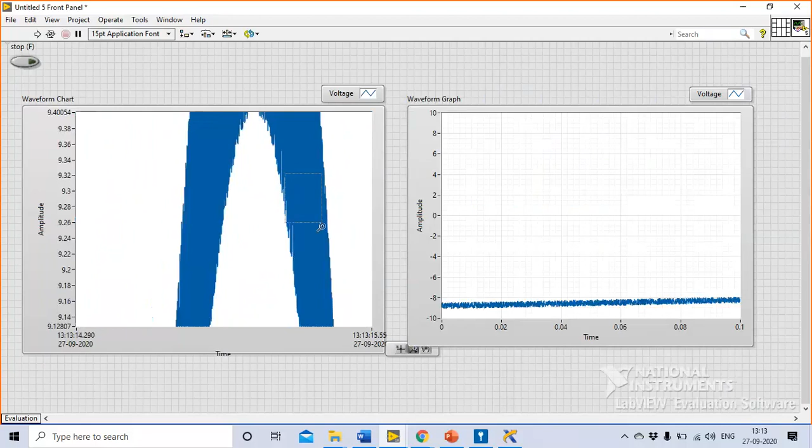I'll stop it. Let's go to filtering now. So before we filter the signal, how do we figure out what should be the cutoff of our filter? How do we define the cutoff? By just looking at the signal, we can't define the cutoff, right? Can anybody, by just looking at the signal, define the cutoff of the filter?

No. So we basically do a spectral analysis of this signal, and based on that, define the cutoff of the signal. So we will do spectral analysis. To do spectral analysis, we'll right click on the block diagram, go to Express, Signal Analysis, and click on Spectral.

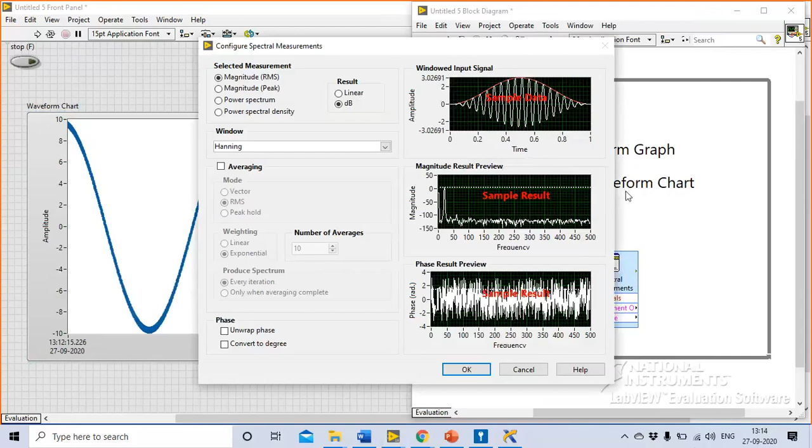Just a minute, sir. Yeah. Right click on the block diagram, go to Express, Signal Analysis, Spectral. Okay, sir. Keep it with the default settings onto the block diagram. Wire your signal to the spectral measurements block.

Sir, I have got one dialog box, sir. Configure spectral measurements. You can leave it to default and press OK, sir. Okay. Now wire your signal to the spectral measurements block. Then cut off this wire which connects the waveform graph and this signal. We will use this graph which we had placed earlier for viewing the spectral data.

Done, everyone? Just a minute, sir. Sir, actually show the block diagram, sir. Means we should disconnect it from this signal data, right, sir? Waveform graph. Yes, you can disconnect from the data and connect it to the output of the FFT RMS signal. Yeah, connected, sir. Okay. If there's any bad wire, you can clear bad wires by Control B.

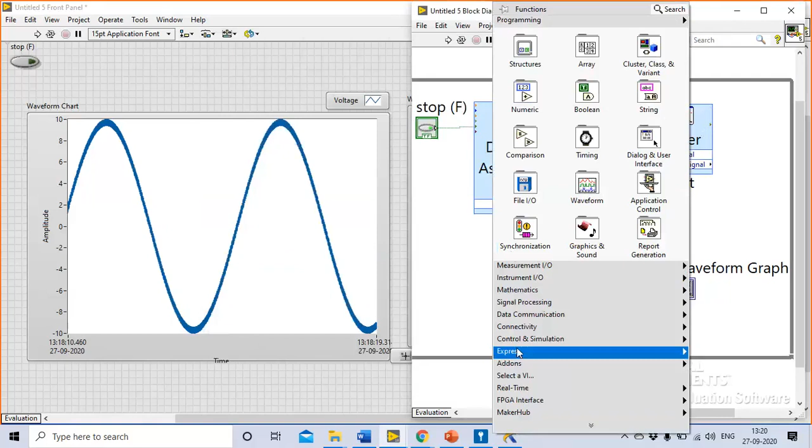Okay, keep it a low pass filter, cutoff frequency of, let's say, 30 hertz. I will leave all of the settings to default. I'm using a Butterworth IIR filter. I will say OK. All of you with me? I had right-clicked, went to Express, Signal Analysis, Filter.

Sir, why is it named Express, sir? Does it mean it is nothing related to the signals? Nothing related to signals. I will explain in a couple of minutes why it is named Express. Actually, when I make Talking Tom, then I'll explain that.

Okay, sir. So now, is everyone able to put this filter with 30 hertz cutoff frequency? What model do we use? Sorry. I think okay.

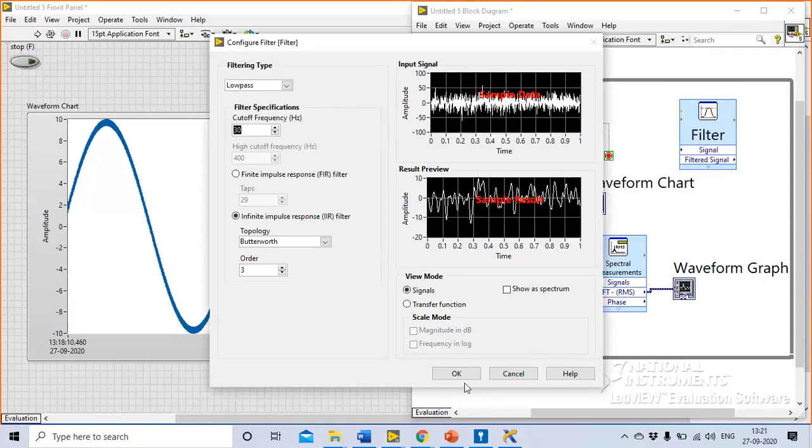Now what we will do is cut off the wire from here. Pass this data directly to the signal input of the filter. Connect the output of the filtered data with the waveform chart as well as the spectral graph. Sir, please just repeat this wiring. Okay, I'll delete all the wiring for now.

Our data which we are getting from the DAQ device should go to the filter first of all. Am I right? Yes, sir. Because we are passing it through a filter now. I'll bring it closer. You can double click on the wire. Right click, clean up wire, so the wire will get cleaned up.

The filtered signal is what I want to show on my chart. That means on the waveform chart which I had placed, this one, I want to show the filtered data here. Can you just press Ctrl U and let's see how it gets arranged, sir? Okay, Ctrl U. It will be different for everyone because it depends on how you placed your components initially.

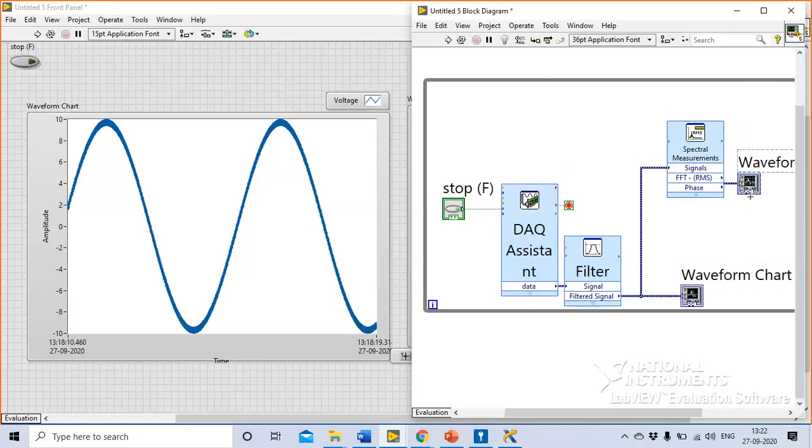So I have the spectral measurements block now. Data goes to filter, output of filter goes to waveform chart, and the same filtered data is passed through spectral measurements for you to see the spectral components of your signal. The dynamic range of your signal, that means this 20 dB minus the noise floor, should improve. And this waveform should also have a thinner band.

Sir, actually now I am a little bit confused. I did not connect the filter to anything. Just a minute. So the output of the signal goes to the filter. You agree with that? Yes, sir. The filtered signal goes to the chart for display. I want to see the filtered data on the chart. And the filtered data also goes to the spectral measurements block for spectral analysis. Yes, sir. Data is connected to signal, and filtered signal connected to waveform chart and also to the spectral measurements block.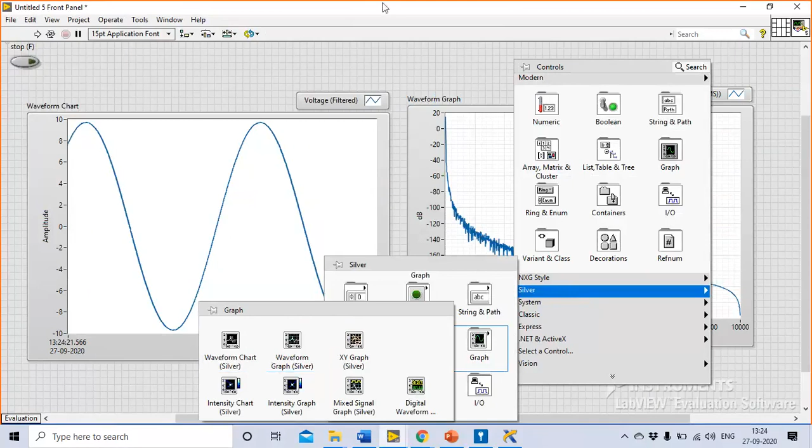Sir? Yes, Raghav. Sir, how do we add a waveform chart and graph? I couldn't find where it is. Sure. On the front panel, right click, go to Silver, Graph, and waveform chart and graph. Got it. Sir, please open the block diagram and just enlarge it. Is that fine now? Yes, sir. Just give me a minute.

Sir, by spectral analysis, how did we come to the cutoff value of 30 hertz? Can you please tell as well? Okay, I'll explain that. Who asked this question? Deepak Gupta. Okay, Deepak sir.

Basically, what does spectral analysis do? A time domain signal is converted into frequency domain through FFTs. Once converted, it will show all the frequency components of the signal. The signal we saw before filtering was a sine wave, but there was some high frequency noise riding on top of it. Is it clear till this point? Yes, sir, it is clear.

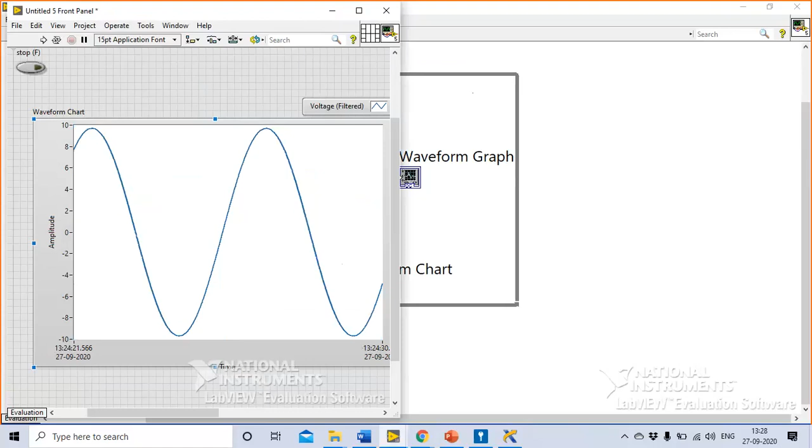So what we did is we took the spectral graph, saw where actually my prime signal is, and from where onwards the noise is starting. When I did that, I found out the noise was sitting at somewhere greater than 20 hertz.

I'll show you that. So what I'll do is I will remove this filter block and put a diagram disable structure around this. You need not do it with me, I'm just doing it to explain the concept of defining the cutoff.

So I will run this. Now you can see the noise floor signal is sitting at minus 40, 50. So I reduce the frequency range to zoom in this area.

I will first of all have to disable auto scaling of my x-axis. So I right click this graph, disable auto scaling, go to let's say 200 hertz. That means I have zoomed in into my signal. So you can see my primary lobe is somewhere in the range of 20 hertz.

Post which I can see a wideband, post which I can see there is no signal power for my actual signal, for my primary signal of interest, but there is some noise floor at minus 40, 50 dB. Noise floor should have been at minus 80 or minus 90 dB, or a very low noise power of signal, but I can see it at minus 40, 50 dB starting from 30 hertz itself. So I've decided a cutoff here at 30 hertz.

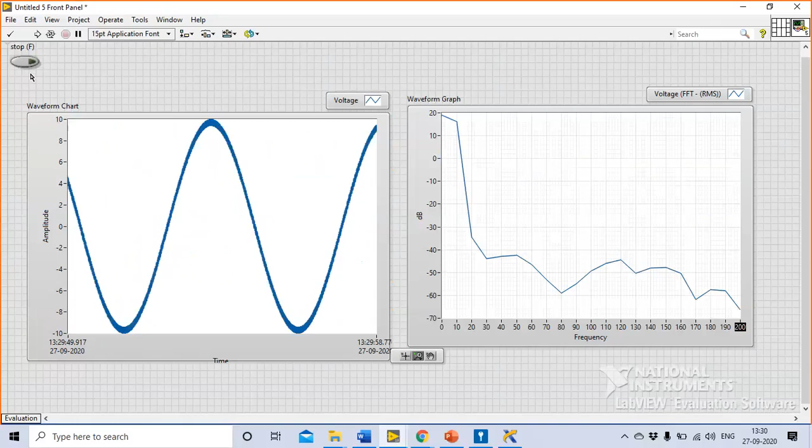We will see the signal now, how it looks like. It will be a much cleaner signal. And you can see noise floor has moved back to minus 90, minus 100 dB. Let me auto scale the x-axis. You can see it's going down minus 100, minus 120 dB.

The noise floor in an actual system, we can't go beyond the noise floor of minus 174 dB. On a simulated signal, you can, because minus 174 dB is the thermal noise floor. Somewhere in that range, my numbers might be off by 2 dBs here and there, but somewhere around minus 170, minus 174 dB is the thermal noise floor. So a simulated signal should actually go to that noise floor or better than that. Right now it is touching minus 220 dB, which is theoretically not possible for an actual signal, but for a simulated signal it is possible.

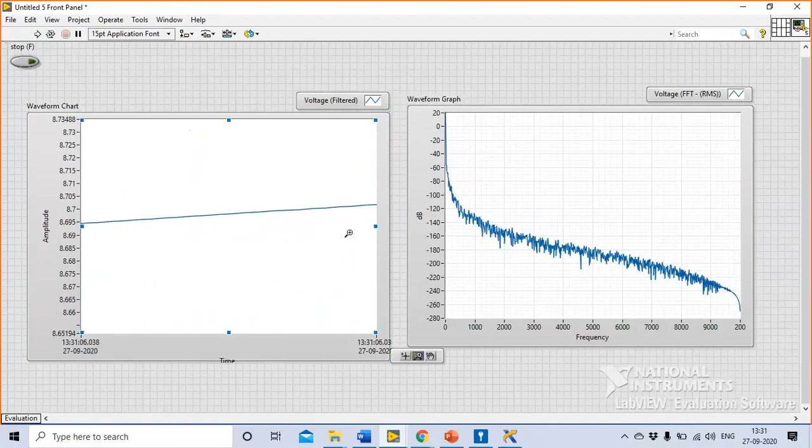You will also see that my signal on the waveform is much cleaner now. I don't see a wideband noise overriding my signal like earlier. Is that clear to everyone? Is that clear to everyone? Yes, sir.

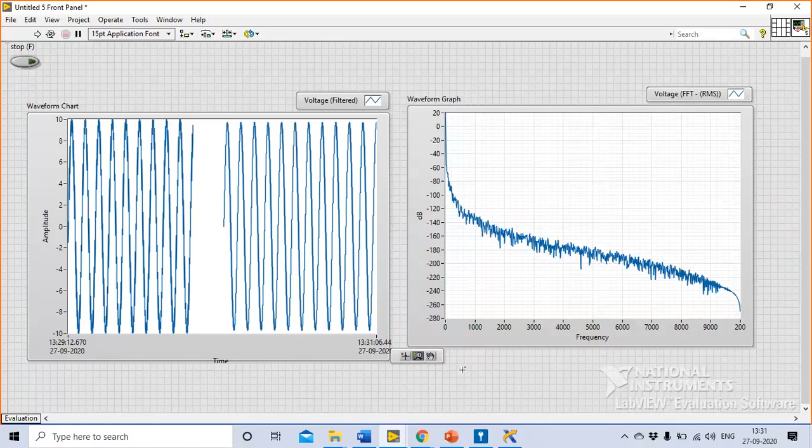So we can see our waveform, which is much cleaner now. What I'll quickly do is, instead of this DAQ block, I'll take 2 more minutes to explain this concept of filtering even better. I will use a simulated signal instead of a DAQ block. I've got the signal from DAQ, but let's simulate another wave, another signal.

So let's get to express input and simulate signal, to get a simulated sine wave of, let's say, 10 Hertz frequency, and click on simulate acquisition timing, and press OK.

Press Control and drag it down. You need not do this with me, I'm just showing it to you. You need not do this with me, just let me show you this. Now I have one signal of 10 Hertz. Let me add another signal of 1000 Hertz.

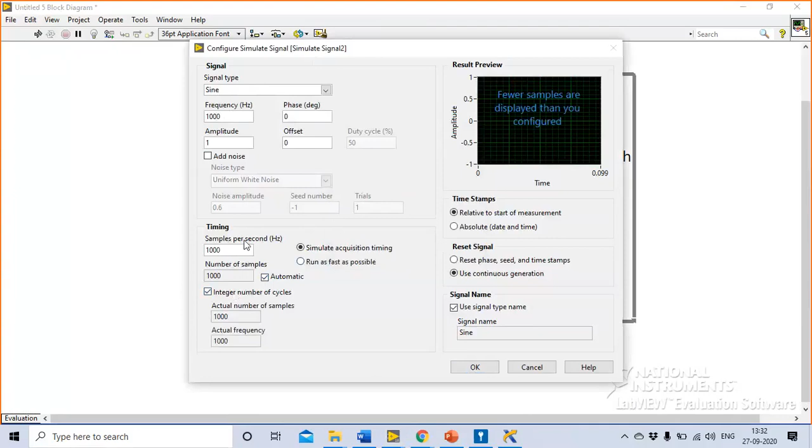For 1000 Hertz, I need to have the samples per second as 100,000. For this one also, I need to make 100,000 samples, otherwise it will show an error.

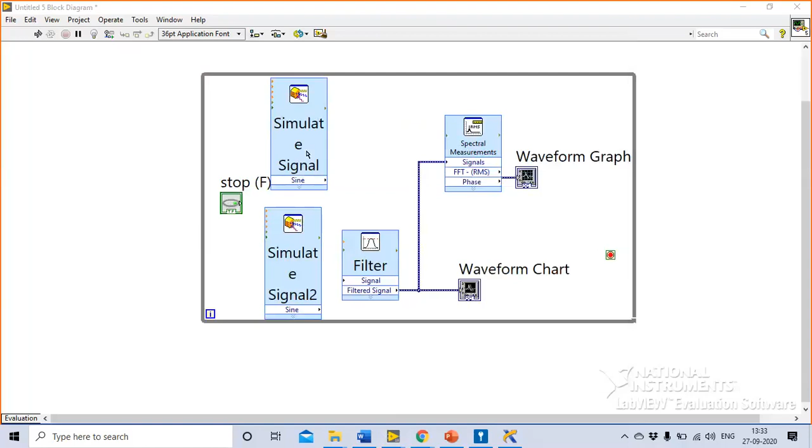Now I have one signal of 10 Hertz, another of 1000 Hertz. I will mix these two signals. Of course, I will reduce the power of the higher frequency signal, otherwise it will show up as a very different signal. I've reduced the power of the high frequency signal.

Now I'm passing this signal directly to the spectral measurements block. I'll remove the filter in between, pass it directly to spectral measurements and to the waveform chart. What we should see on the screen is there should be two peaks in the waveform graph, which is doing the spectral analysis.

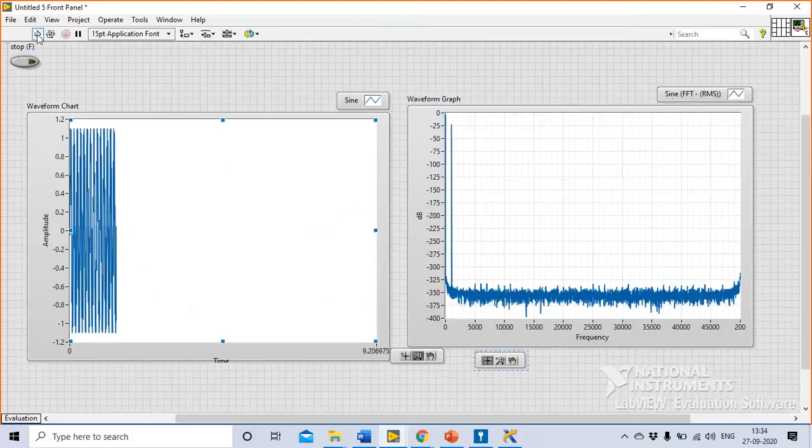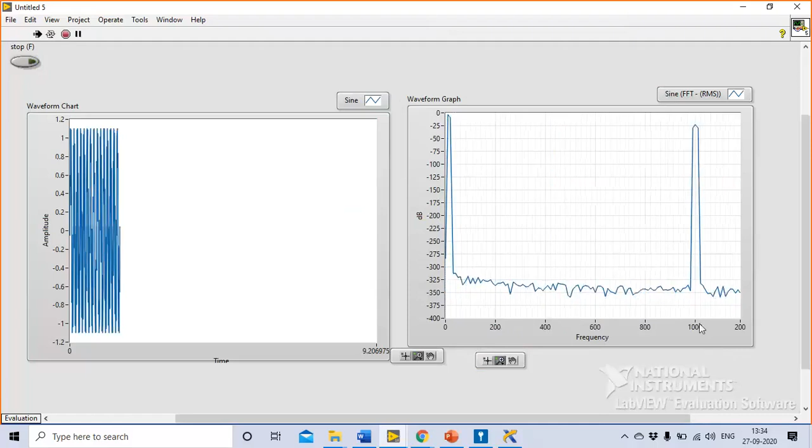Let me zoom in on these signals and show you. Visible items, graph palette, auto scale axis. Can you see two peaks? One at 1000 Hertz, one at maybe 10 Hertz. I'll show you the signal. Can you see the signal with a lot of noise riding on top of it?

Shweta ma'am, I forgot to answer your question. It is connected to FFT, not phase.

Is it clear? You can see two peaks and the signal riding on top of it. Now, if I have to filter it, what frequency should I choose? What should be the cutoff frequency of my filter now, if I only want to have this signal?

Any answers? What should be the cutoff frequency of my filter? 30 Hertz? We just zoomed from that, I guess.

So, but my noise floor is at a very minimal value, sir, minus 325 dB, right? Theoretically not possible, practically not possible, but the noise floor is very low. So I want to remove this signal, so I can use any frequency lower than this signal, right?

If I set my cutoff frequency as, let's say, 600 hertz, then I will still be able to cut this off.

Deepak sir? Yes, sir. I don't want to remove this noise floor because this is very, very minimal. Earlier it was at minus 40 dB, so it was a problem for me. But right now this signal is not a problem, but this signal is definitely a problem. So any cutoff frequency of a low pass filter below this peak would help me remove this signal.

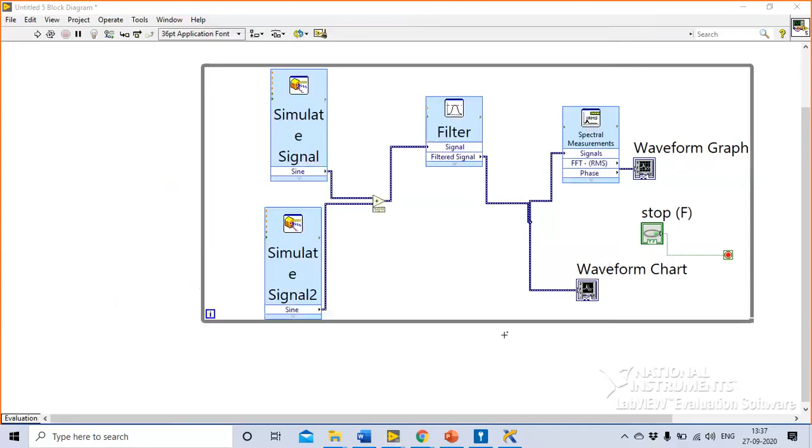So if I further reduce the frequency or increase the order of the filter, the power of the noise component should further come down. If I make it 100, the filter will roll off better, and the power of the signal should further go down. You can now see the signal has gone down to minus 75 dB with respect to 0 dB of my actual signal.

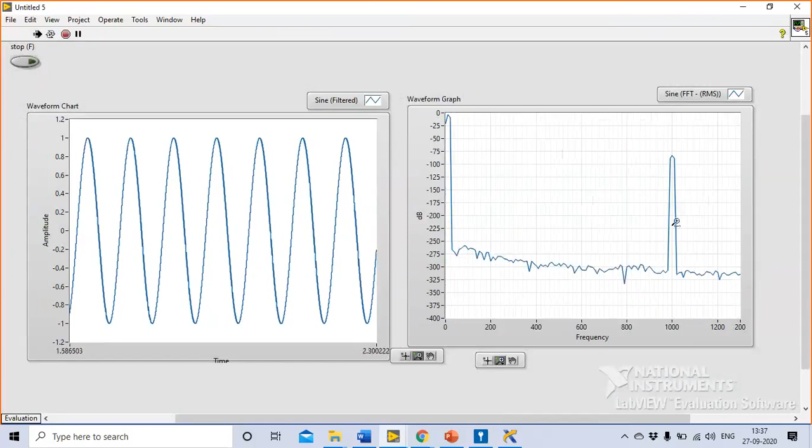Deepak, so you can see the power of the signal is continuously going down as I change the cutoff of the filter.

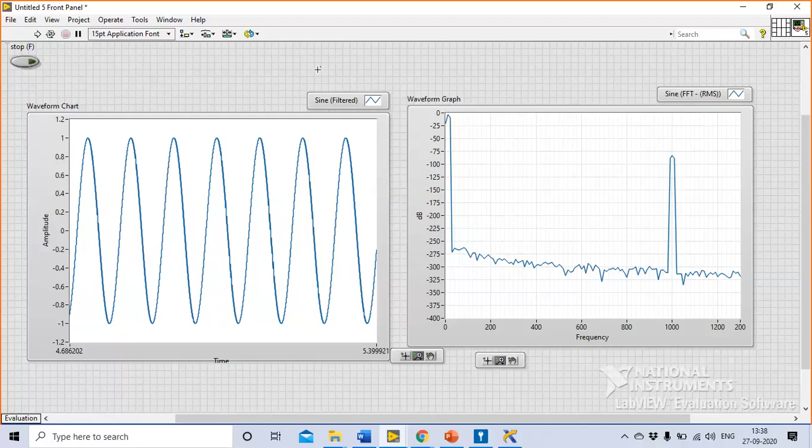Thank you, sir. Thank you, Vinit, for this wonderful session. I think in the afternoon we'll have machine vision, right? We are yet to finish the Talking Tom piece, sir, so I want to finish Talking Tom and then get to machine vision.

Okay, yes, so these are signal processing applications you have taught. Yes, sir, filtering, signal processing. Now we will work on playing around with the waveforms as to how we can change the frequency of the waveforms to create a different signal.

Sir, after completing this, it will be in action, right, sir? Means Talking Tom actually replicates what we say, means it will do that. Absolutely, sir. Sure, sir.